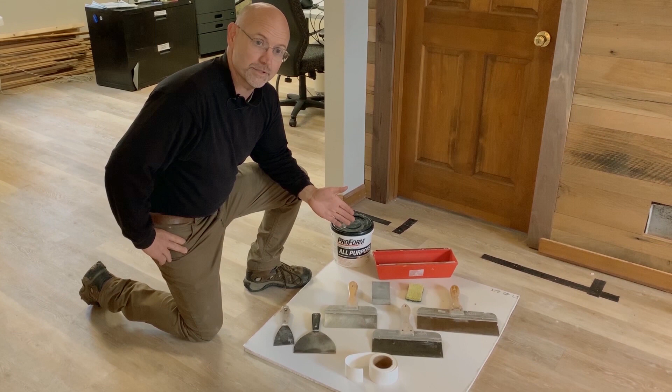The tools that I have in my drywall toolbox are these. You may not need all of them, but some of these will really help you on small repairs around the home. We have a 4-inch knife, a 6-inch knife, an 8-inch knife. I have a 10 and a 12-inch drywall knife. What you really need are the 4, the 6, and at least the 10. 12s are nice, not mandatory. You can usually do everything you need with a 10, but 12s are handy. 8, not so much for the average homeowner, not necessary.

Then you have the drywall tape. This is the paper tape, which I think is superior to the mesh tape. Each his own. Use what you like. Then you have a sanding block for once it dries and you want to sand it down. Some people don't like all the dust, and drywall dust is very fine and it gets on everything. So a damp sponge works well if you're careful.

It can be aggressive. You can take off too much of the joint compound after it dries with the damp sponge. So you just have to be careful when you do it. Also, I don't think that the texture is as clean as using a fine sanding pad. So you may want to go over it at the end with a sanding pad just to make it look smoother.

Then we have our pan to put the mud in, and I mix my mud in the pan with water when necessary, so the consistency of the mud is correct. And then we have the joint compound, also known as the drywall mud. That's the term we normally use. And this is what I use. You can get it locally, pretty much anywhere. It all works well.

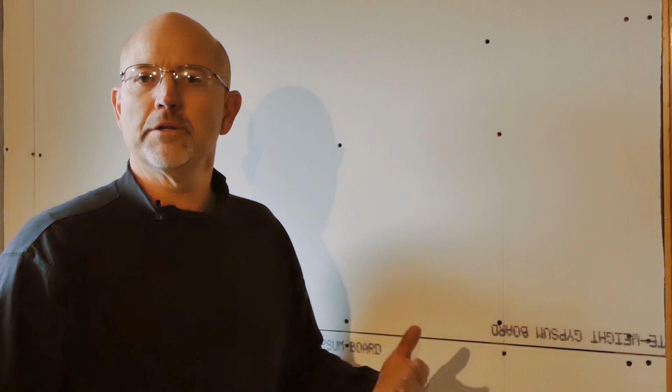The object of this presentation is to show you how to mud and bed a drywall joint so that it is smooth and it blends into the body of the wall unnoticed, as it should be. Now, when you're working with factory drywall board, you have the ends, which are blunt and square, and then you have the factory edges on the long side. You may not see it in the video, but these factory edges have a bevel. This one bevels, and this on the bottom bevels as well. So that creates a recess that you can bed your piece of tape to.

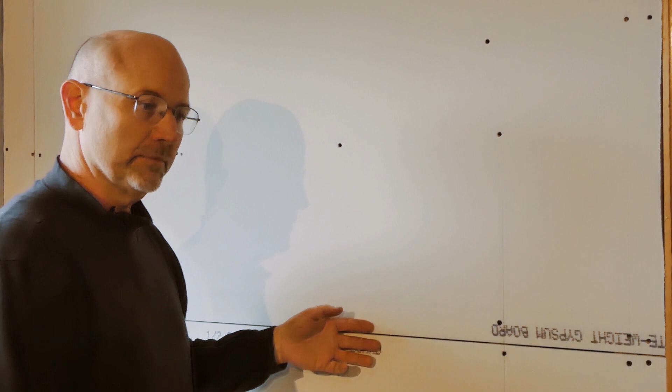Now, what the drywall tape does is it connects the two boards together and it fills the gap. And applied correctly, it will be so smooth that no one should be able to notice it. So how thick should your drywall mud be? Well, on the wall, the mud should only be thick enough to bed the tape in, recess it into the groove, or flatten it against the blunt end, and then you will add coats over top very thinly to eventually fill it up. You don't want this heavy.

You do not want the mud to be put on so thick that it's very proud and sticks out. That's what catches eyes, and that causes a lot more work to get it smoothed down later. The mud that you put in your pan to work with should be smooth enough to apply easily, but not so thin to be like pancake batter where you try to put it on and it just runs down the wall.

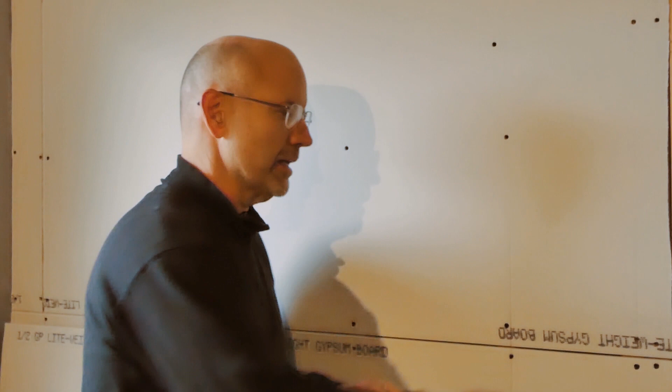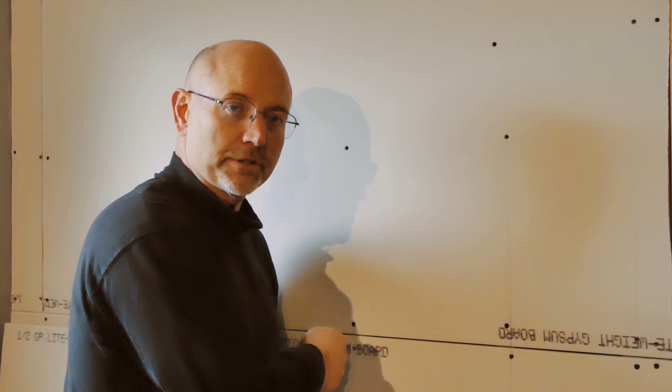Now, mud straight out of the bucket is usually too thick. It can work, but it's thick and it's clumpy and it's more difficult to trowel on. So I always add a little water at a time, and stir it until the consistency is just right, that it applies smoothly, but it doesn't run down the wall. It may fall off of your knife as you're sliding it across, but that's okay. That can be cleaned up later. You want it to stick, hold firm, but smoothly trowel on.

You may be asking, can I apply this one time and be done? No. Plain and simple answer is no. This is not a one and done operation. You have to put your mud on, put your tape in, bed it in, let that dry, come back, knock off the burrs, sand a little bit if necessary, and then put another coat. I'm telling you, it will take you probably 3 applications to get this done.

But if this is in the house you're living in, put a coat on in the morning, go to work. Come back in the afternoon, it'll be dry. Put a fan on it while you're gone. That may help you. It'll be dry by then. Then knock off the big burrs and high spots and put another coat on. You'll have to put on at least 3 coats to make it look right. But again, you're not trying to put on heavy coats. You're trying to put on thin coats to cover and to spread out and feather your joint so that it is not noticeable.

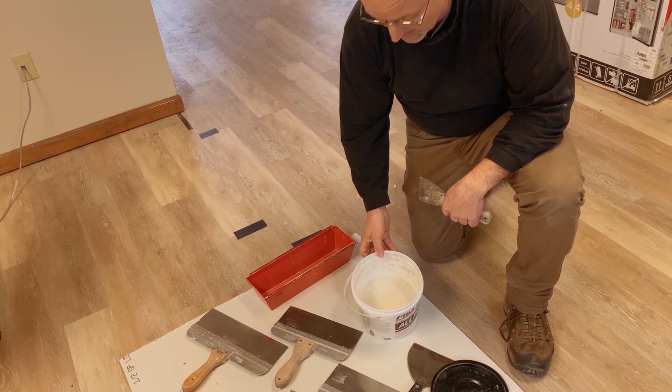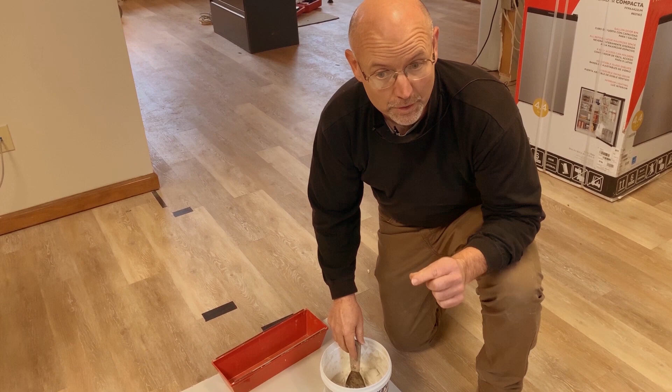I'm ready to mix the drywall mud up. Now this is a container that I've used in the past, so it already has water inside on the top. So I'll start stirring it. As I stir this, I want to make a couple notes to you. When you put drywall mud back into a container like this to use later, make sure you don't put any dry drywall back in there, and do not let it build up on the sides of your container, because those pieces will dry, they'll fall into your fresh, good drywall mud, and then the joint compound will have little burrs, and every time you try to run a nice smooth bead across your wall, there'll be little scratches and hitchhikers. You don't want that.

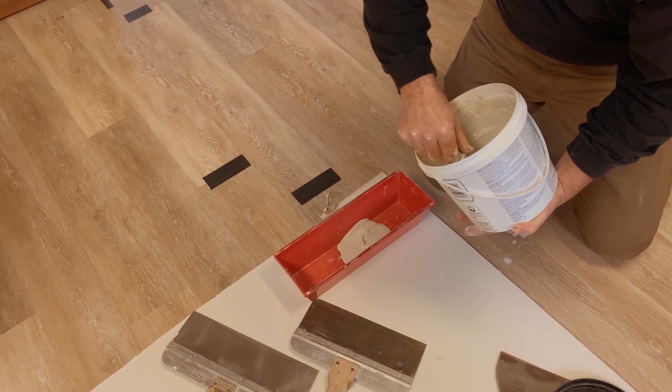I have the consistency where I want it, smooth but not runny. And then I'll fill up my pan, have it ready to go. Now I've had people ask, what's that made of? How do you clean it up? Water. Don't even need soap, just water cleanup. It is predominantly baked limestone that's been crushed with a few other ingredients to make a nice, smooth, creamy joint compound. The dust you would not want to breathe because it's hard on your lungs. But the mud, it's pretty benign, and it just cleans up very simple with water.

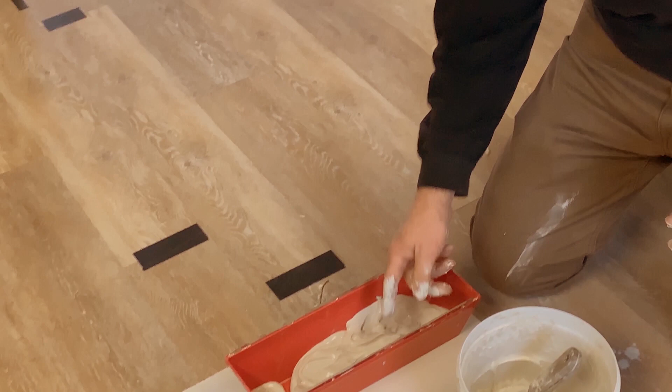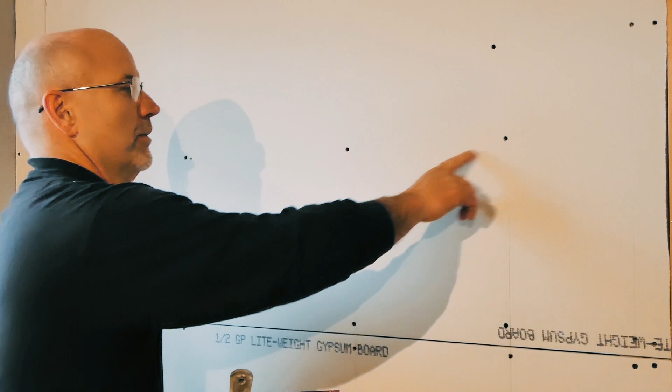At this stage, we're ready to apply the drywall mud on the joint and bed the tape into the joint to help cover it over. Also, we'll patch a couple of these screw holes up here and show you how that works as well. Because drywall mud is full of water, it needs time to fully dry before you put the next application on. So you have to keep that in mind. It will take more than one time to get this job done correctly.

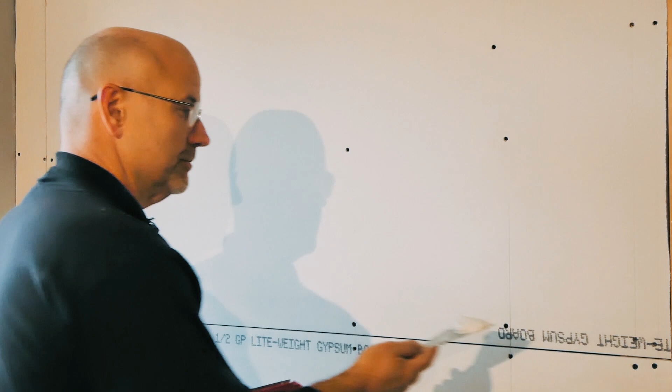I'm using the 4-inch knife. Fill in the joint. I could use the 6-inch knife for this as well, but this would be fine. You can see I'm layering it up pretty thick, but I will be applying pressure once I put the tape on and pressing out the excess drywall mud. I don't need all that when it's all said and done. Here's the tape.

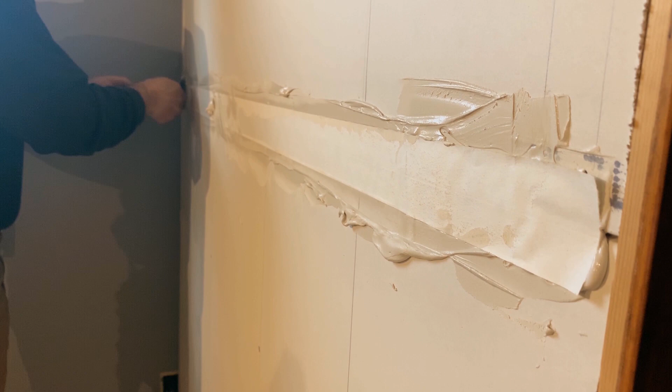Now the tape is mudded. If you were a professional drywaller, you might go back over there and put a coat of mud on top of the tape. And that would be perfectly fine. But I would say for the average homeowner, let this dry. I'm not done yet. Now I'm going to use the 6-inch knife to get off the excess.

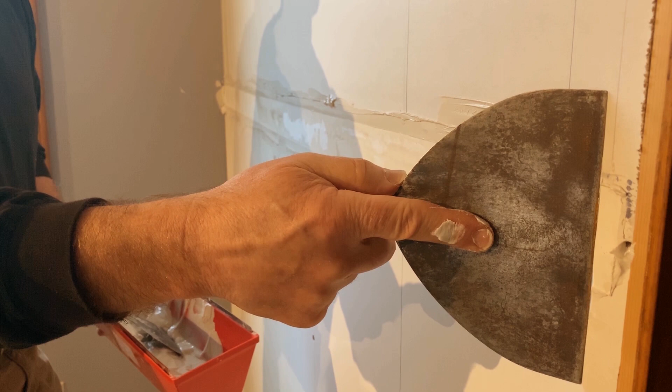This way, when you come back later, you don't have to sand and knock off a whole bunch of high points. You can just go right to it. And try not to go over it too often. The more you work drywall joint compound, the drier it gets. And then if you do it too often, the tape won't stick. Right now, it's wet enough and it will adhere.

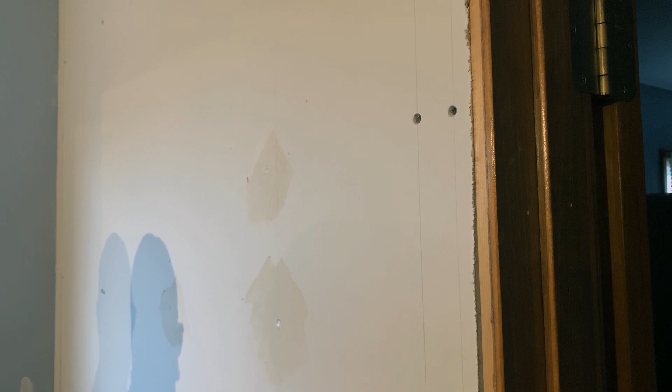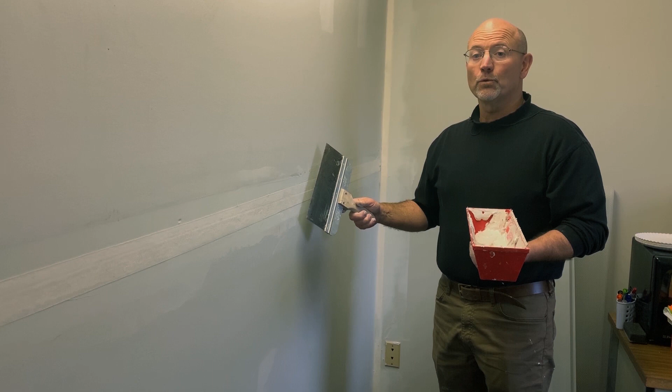We'll let this dry. Sometimes air bubbles will get behind the tape and the joint compound will not be fully free of voids. That's why I kind of go over it different ways. There we are. Now, because drywall joint compound shrinks, we'll have to go back over this another time at least, maybe 2 more times. But those will eventually be smooth and part of the wall, and you won't even notice them.

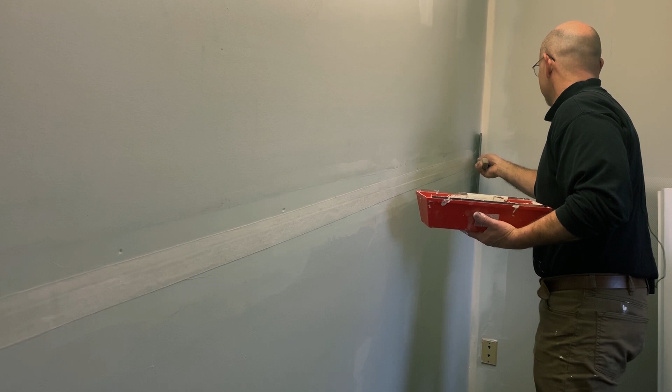Here, this particular wall, the drywaller taped the joint last night. It's dry this morning. Thankfully, he did a nice job, and there's not too much mud sticking up. But I'll take this 10-inch blade, and I'll run it down here to knock off any high points. Very well. Then up here, you can see the screw holes where the mud has shrunk, as it always does, and is indented into the wall. Now, this one sticks out proud, but it's still shrunk in the middle.

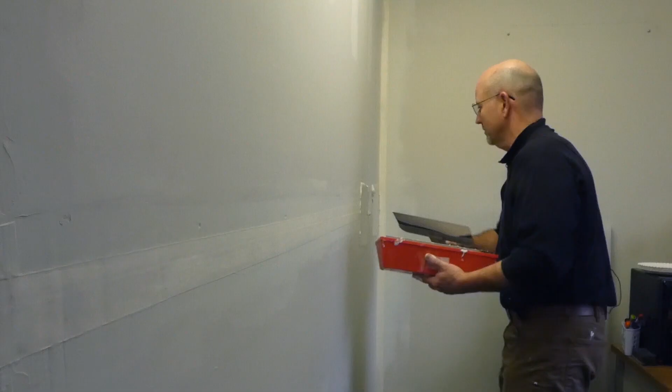There we go. I will put another coat of joint compound on the tape to help feather that out, and I'll fill these holes up a little bit again. You can see I'm spanning the joint much wider at this stage. I can come below, knock off the edges.

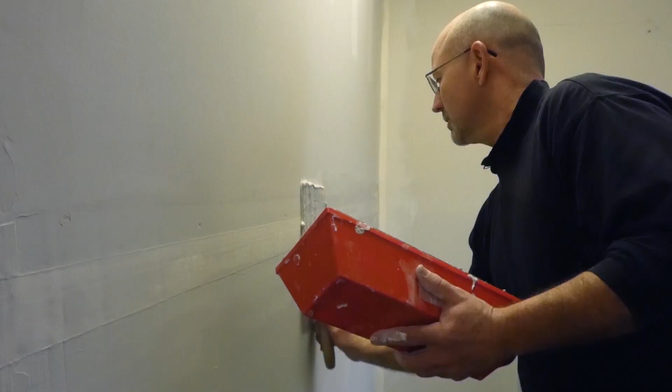This is a sloppy job. You'll get it all over you. I already have one myself. But as I said before, it cleans up with water, goes through the laundry with no problem.

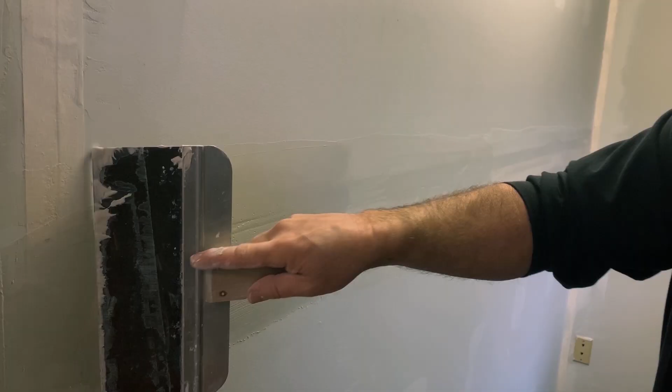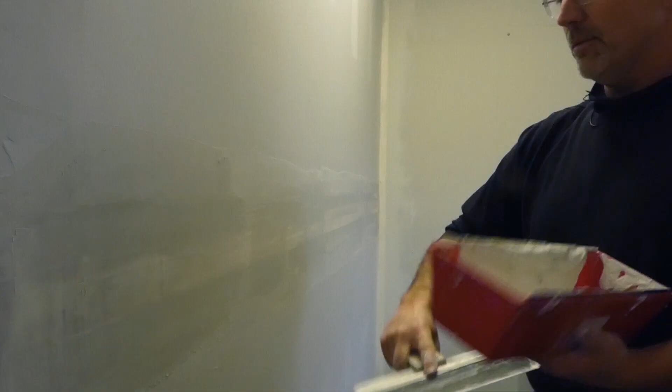Is that good enough to paint yet? Absolutely not. It's going to take one more coat to do right. Now my drywall mud is starting to get a little dry, and you can see it's starting to catch there. So I need to put some water on it. But that smoothed out the tape line very well. We can lightly sand that next time we come back, lightly, and then put another coat. The next coat, we will overlap here and there, smooth it out. Our joint will be feathered well, and when this is primed and painted, you walk in here and it won't be noticeable.

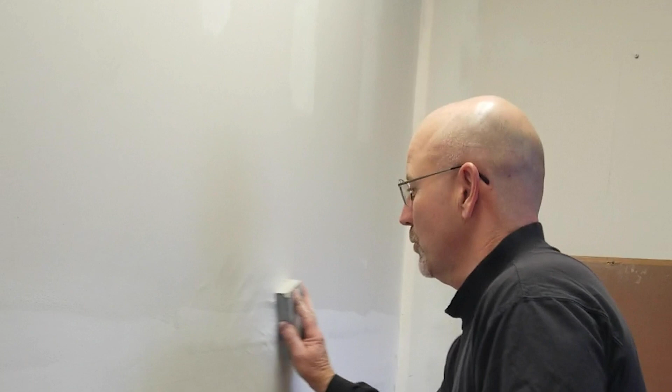At this stage, this wall has been taped and bedded, and then we've had a second coat of drywall mud over top of the joint line. What I'll do today is I will lightly sand this just to get the high spots and the imperfections out, but it won't be done. I'll have a third coat. Quickly sanding it. That's all I need to do, because I have made sure that I did not put too much mud on.

That's why I go over a joint 3 times. If you go over it less, you're usually putting more mud than you need to, then you have to sand more. And I can't stress to you enough how much you don't want to sand. The least amount of mud means the least amount of sanding, and that's what we're working for. The next step, I'll put the last coat on this joint. Last coat of mud will be put on, spread it out.

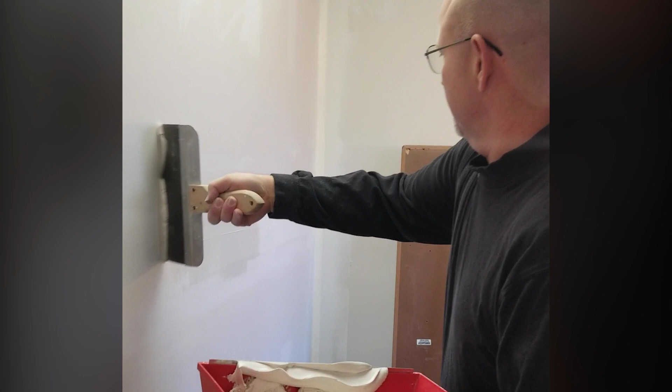That'll cover imperfections, feather it out, make it smooth, and then once that dries, a light sanding, it's ready to prime and then paint. Real estate inevitably means small patches and repairs need to be made. These jobs are not as hard as you may have thought they were. They just take time and patience to complete successfully.

Are you preparing to sell your house in the near future and have a punch-out list you need to take care of? Or are you planning on purchasing a house with the intention of making these small repairs yourself and don't know where to start? Hopefully this video has given you the confidence and has inspired you to consider tackling these jobs on your own. I know you can do it.